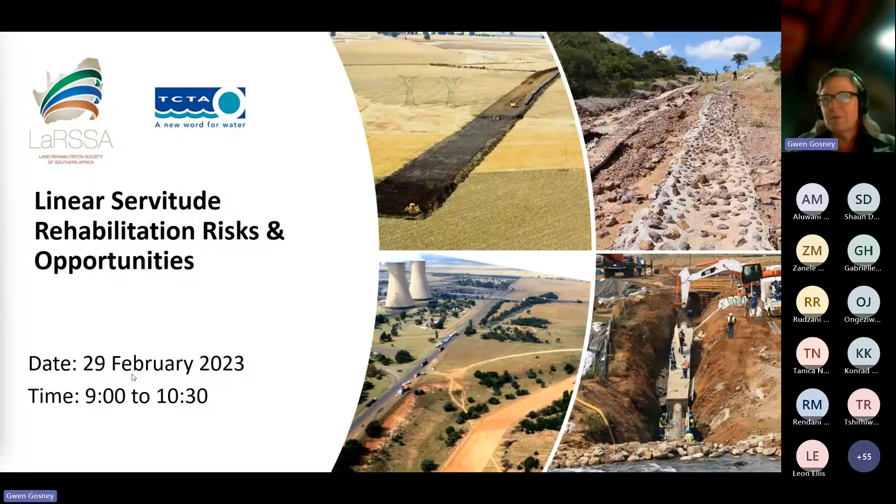It's all about thinking in lines. It's about thinking outside of the box, down the line, having a bit of vision. But at the same time, it's very important that as a person working in linear infrastructure, whether or not you're working in the rehabilitation element, you don't end up with tunnel vision, because that's the last thing we need. Ironically, working down a line, you need a very open mind and a very wide way of thinking.

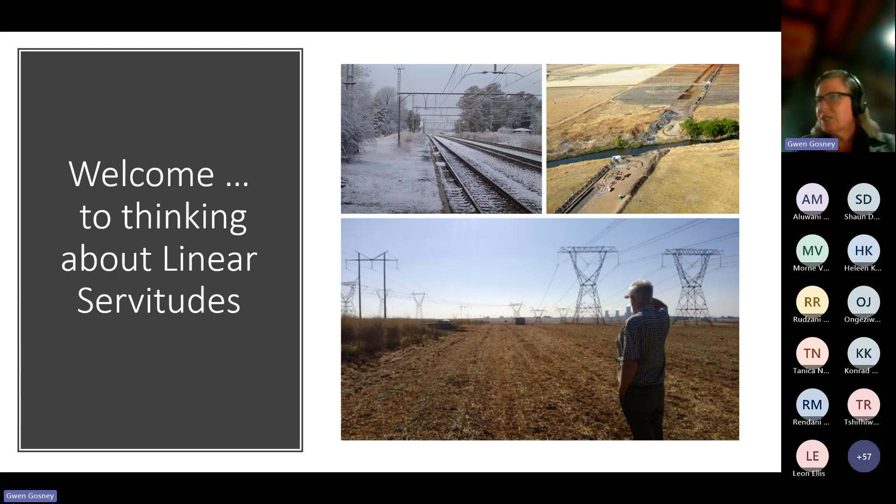So I'm not going to be able to divulge or go too much into roads and railways. I'm relying on input from the audience for that. My specific interest and passion has been with pipelines, particularly subsurface pipelines. Of recent, right in the beginning and right at the end here, we've been working with pipelines as a form of conveyancing infrastructure for large interbasin transfers of water.

I work for TCTA, who you will see is up here at the corner. We provide infrastructure to the Department of Water and Sanitation, dams and pipelines, so that they're able to convey this valuable resource of water all the way through to the water boards, the municipalities, and if the pipes are not too broken, to the end users. But we really are involved in the bulk supply side of things.

But if you think about servitudes, linear servitudes and pipelines, the other part of my experience came from working on the NMPP pipelines. There was the 501 down to Durban, 500 kilometers, which I wasn't too involved in, but at the same time, I was involved in running the 3 inland lines concurrently. So that was a very interesting time for us.

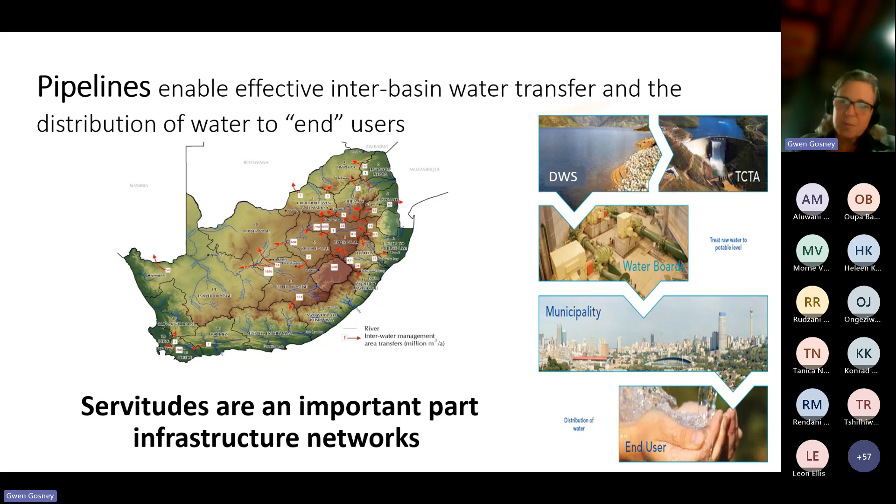Okay, great. Rudzani, I see you're involved with transmission lines. The pipelines often go parallel to the existing transmission lines. So yeah, I'm sure we'll see some transmission lines in the back here. And hopefully while we're chatting, we'll try and identify some of the differences between the kind of rehabilitation for transmission lines and that for the pipelines.

I think many of the rehabilitation challenges that we face on these linear projects are because people don't understand the complexity of what a pipeline means. It's a very narrow servitude. It's very easy to access. It's quick up and down in many ways. And people just think, oh, it's a small, narrow band. What can it really do? What's the real problem? For me, it's one of those things where it looks like a little straw and it's so easy to deal with.

And I thought in the beginning it was going to be easy. And I see we've got somebody from NCC Environmental Services, and I was with them when I started this pipeline journey. And Dean Ferreira was there, and he said to me, we've got this little job. It's a big pipeline construction. We just need you up there for a few months. And that was in 2006. And I'm still up here dealing with pipelines in one way or another.

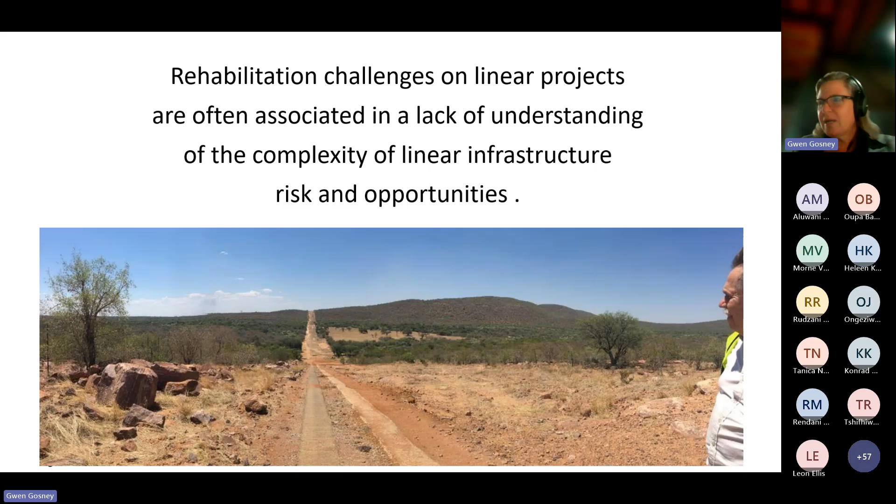So what makes a pipeline or these linear servitudes very different is we have a huge number of stakeholders. Each of those stakeholders along that linear infrastructure has got their own needs and expectations. Those needs and expectations often relate to their land use and very much their expectations of how you're going to look after their interests. So that's very interesting.

These long narrow servitudes cross so many different landscape features, ones you can see as well as those you can't. We're going to talk about all of these things in detail. Numerous land portions have got different ownership. We've got some land that belongs to huge commercial farmers, others that belongs to community organizations. Some of it's got informal settlements on it that don't have any original land ownership, but it just settled on those properties.

So the topography is another interesting thing, constantly changing, always up and down, literally from left to right. The topography plays a major role in how we design and successfully manage rehabilitation within our servitudes. The range of land uses, we'll see lots of examples just now. And I think anyone who's done any linear infrastructure will always be surprised by the number of land uses that you can find along a straight line.

The boundaries and the interfaces along edges, when I did my master's degree, was a major finding for me. It's like realizing that this is one of our most sensitive areas, is anywhere where you have an edge or a boundary. And then always there's these access and accessibility constraints that make pipelines different from being able to drive up to another area, a farm, a mining rehab site. You've got security and access control there, but you don't have a problem getting to the point there is generally access provided in one way or another.

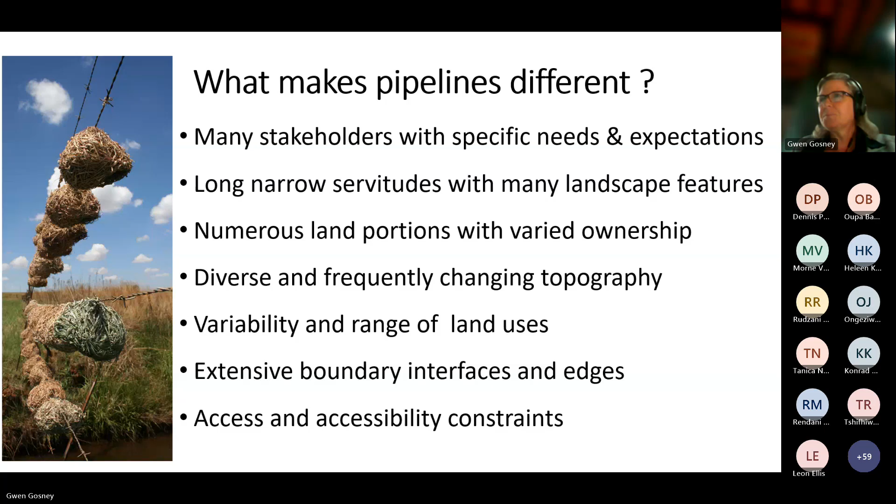Typical servitude challenges that we deal with include the suitability of the design of the rehabilitation to achieve its objective, and quality control and supervision. It doesn't help to have the best designed rehabilitation plans if the actual implementation and control of these great plans didn't work so well.

Slow rehabilitation and lagging construction works is another issue. Quite often on a linear infrastructure with pipelines like this, you've got a lot of damage to go and fix, but it doesn't help when there are lots of technical issues that people have to go back and fix along the pipeline, literally accessing over the rehabilitation you've just completed, probably almost got to sign off.

Drainage and erosion problems are immense. Impacted soils and impacts on the soil chemistry, the organic content, and just the physical structure of the soil can be quite heavy depending on the kind of development that's taken place.

Failing access routes are also a challenge, particularly over time - it's not always easy to access. Even if there was an access route designed in, sometimes they fail and you can't always get to where you want to be. And then, of course, Mother Nature and Father Time always throw a few interesting curveballs at us when we're trying to do rehabilitation.

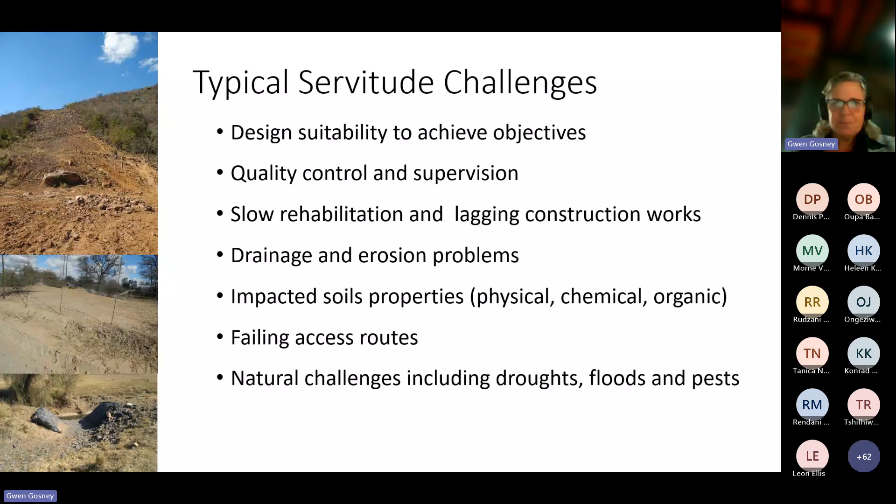I think the first and best place to start is understanding the relationship between the receiving environment, the type of disturbance, and the rehabilitation that has to take place.

And it's really difficult when you've got to come in and look at how we limit the risks and make the most of our opportunities in these areas, to really understand that the sensitivity and changeability of that sensitivity rating is huge. But we have to look at how we rehabilitate in terms of planning it.

You can't plan rehabilitation up front and think you've done a great job. A lot of people get an EMP after having authorization for a linear infrastructure development like this, and go ahead and develop a specification. But we really have to then apply ourselves at that early phase and ask: how is this rehabilitation specification going to stand up to the project challenges - the impacts it's going to get, the nature, the intensity, the extent of the impact, and how long?

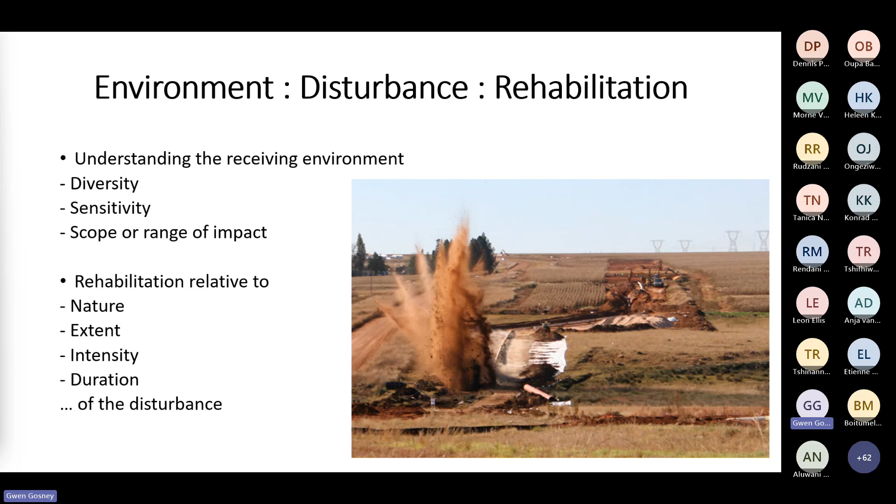Okay, let's see - typical rehabilitation challenges. There's a lot of planning and planning documentation that's always required. And quite often at the end, I think we look back and say, well, was this something we really wanted to do, really needed to do? The suitability of requirements.

A lot of these things we're going to have a look at, I've already mentioned. It's just like a page to put everything together. Poor drainage management, I don't think I've spoken about before, but that's a big thing.

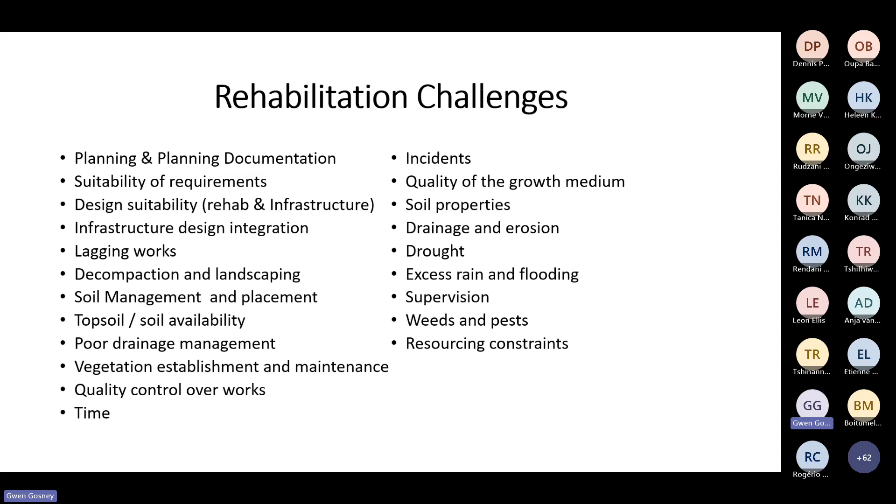We're going to go through all of this, and time is often not on our side, particularly with pipelines. There's a lot of pressure to get construction completed and handed back to the landowners, so we can hand the projects over to someone else. That time pressure is big for us, but the problem is that your cost, your time, and your quality go out the window if you haven't done your planning properly.

This is where our rehabilitation is often really heavy. When I did my master's, I looked at what the requirements were for us in planning rehabilitation, at our authorization conditions and legislation, and at all the control and source documents of where the requirements were coming from.

It was very interesting to see there was a lot of requirements around planning and administration, but as you got into the nitty-gritty of the work, there was very little required in terms of showing your planning of drainage management, landscaping, vegetation, maintenance, monitoring and evaluation - that was a total gap. They required method statements for certain things, but not for maintenance or monitoring and evaluation. Mitigation measures had to be planned and designed, but they weren't monitored or measured to determine whether they were being effective.

Our friends in auditing and compliance are always there and very strong, but I would argue that compliance to a bad requirement is probably more dangerous than non-compliance, for the sake of environmental protection. We might see a few examples of that as we go through.

There's always requirements to document and report on your planning and monitoring, but they don't ask you to document and report how things are going with the interim actions around landscaping and preparation. There's very little sign-off and acceptance interest during the actual brunt of the main work and the maintenance - they just want to know it's planned properly and closed out properly. That's a bit of a gray area for me, and it's something we're working to improve as we go into new projects with improved controls.

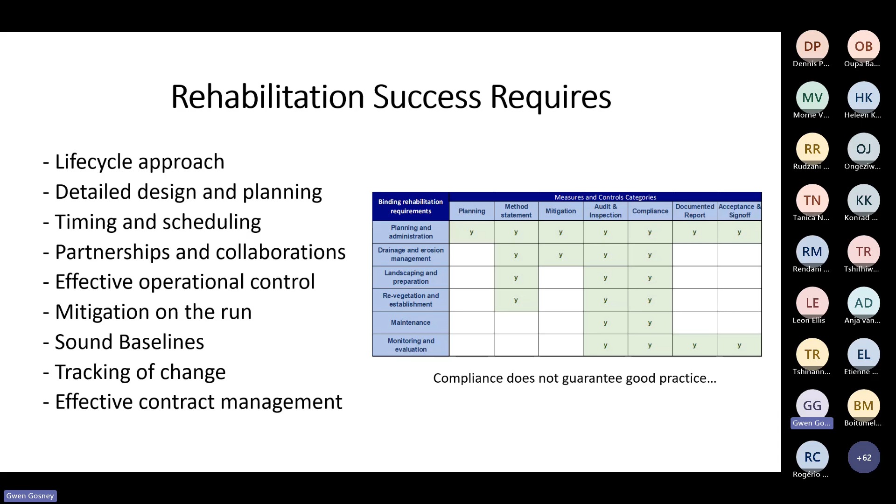So let's have a look at some of the interesting stuff. Linear considerations - there's always this knock-on effect, this ripple effect. If one thing is not done properly, it has an effect all the way down the line.

It's something we've had to look at and really say, how do we make sure that the variability in our servitudes and our landscapes is catered for properly, and that the knock-on effect down the line, that ripple effect, is dealt with properly? Topography, soils, vegetation, land use, and the land management philosophy.

The land management philosophy is interesting because each different land portion, landowner, and land user whose property you cross has a different philosophy on what should be happening, and they're all experts. So it's very interesting sometimes as the environmental practitioner on a site to come in and deal with those various philosophies and reconcile your planning with the expectations of those landowners.

End-state planning is often something we don't consider. My very first pipeline, the specification was to take everything back to grass immediately. But at least a third of the construction servitude was through maize lands, and if anyone knows a maize farmer, you'll know that grass is weed number one. So that's really about making sure that end-state planning is understood.

Quality input information is always very valuable. We get a lot from the impact assessments, but quite often it's exceptionally generic. There's a lot of baseline studies and pre-construction surveys that need to be done to make sure we properly capture what the baseline conditions are.

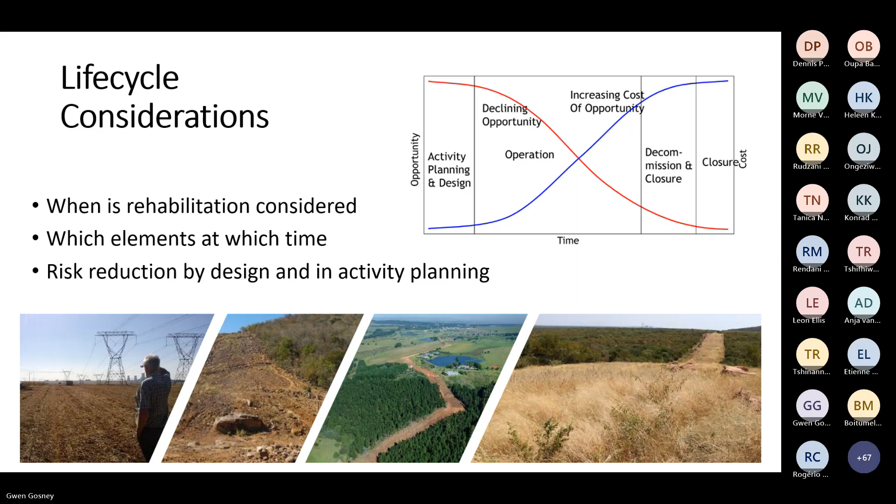We have to ask ourselves, and this is a frustration from many people in the environmental management space: oh, but it's an environmental thing. This rehab stuff, it's just going to quickly plant grass, and it's this environmental job at the end of the project. And it's okay if we demobilize all the other resources and just leave an environmental officer on site to watch the grass grow.

But if we're going to do effective rehabilitation planning, specifically of linear infrastructure, but I think this is common to all rehabilitation planning, we have to really understand that this takes place through the project life cycle and that there are a huge number of interdisciplinary people that collaborate to give us these successful results. I'm not just talking about the knowledge and practice areas that are environmental sciences, your rehabilitation specialists, your wetlands, your ecology people. We need specialists who understand scheduling, costing, resourcing, procurement. We really need to make sure all of these areas perform well in the way we specify our rehabilitation, go about resourcing it and planning it.

There are a lot of considerations that are not environmental considerations. And the one thing I don't have here seems to be designers. Designers and hydrologists, people who understand the flow of water through a landscape, need to be deeply involved in the drainage management planning of our rehabilitation for closure. Otherwise, we're just not going to get it.

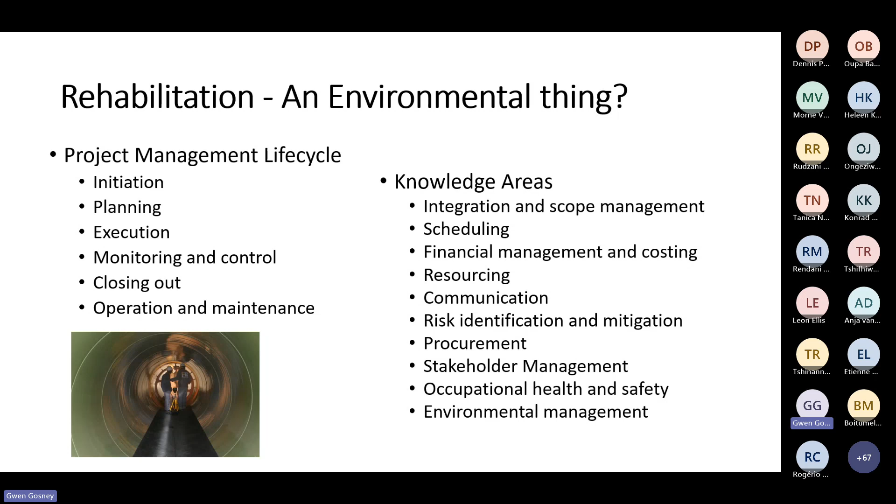So it really isn't just an environmental thing. There's a lot of environmental specialists involved in proper rehabilitation planning, but I'd like to urge that it's so much more. It's not something that happens at the end of a project, but that we really have to integrate into it.

We want to be paid for what we're doing. We want value for money when we're delivering it. And we want to make sure that there are no unexpected financial impacts or implications on us. We all know about rehabilitation provisioning and making sure there's financial resources, but it goes far beyond that. The landowner on the property wants to know that there's going to be no impact on his actual income potential and earning from that property when it's returned to him.

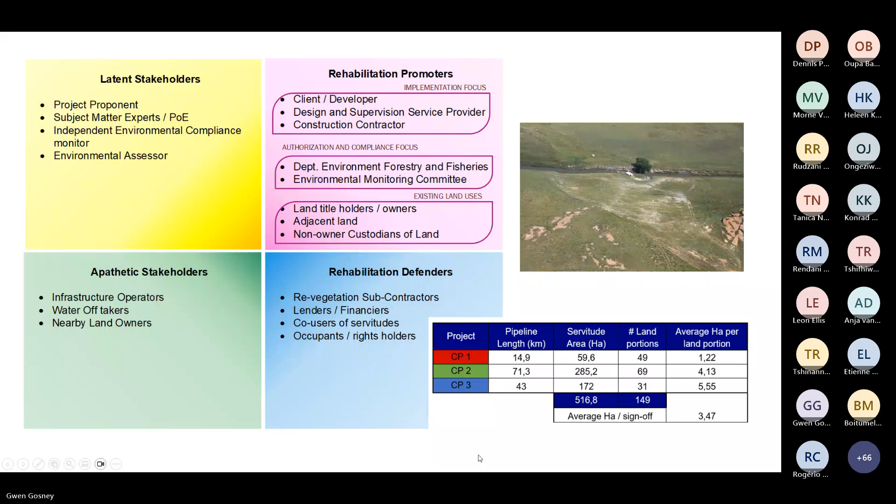These stakeholders come from many different walks of life, many different economic classes. And yeah, we've all heard the thing: not in my back garden, not on my back doorstep. Well, this is how it is.

Our linear pipeline developments go through a huge array of land uses. The specifications and the planning from an impact assessment perspective do not always consider the needs and expectations of those land users from a rehabilitation perspective.

They all look at it from a construction perspective - irritation and people being frustrated at the noise or the dust. But they're not really looking at a lot of the core issues of what is going to happen with rehabilitation towards the closure of our projects.

We've got high-end developments that have existing services that might be disrupted as we're constructing. But we also go through some very rural communities. And I always ask, what is the quality of the planning that's gone into this infrastructure development when you're taking a raw water bulk transfer line through a settlement where there is no access to running water?

So that's a very interesting thing around stakeholder engagement when you want to get buy-in.

Our construction servitudes - when I say the specifications are not always dynamic enough to cope with the type of end-use planning that our stakeholders need us to account for. We've got vegetable gardens, we've got crop farms, we've got other linear infrastructure owners. But then, of course, there's private properties and golf clubs.

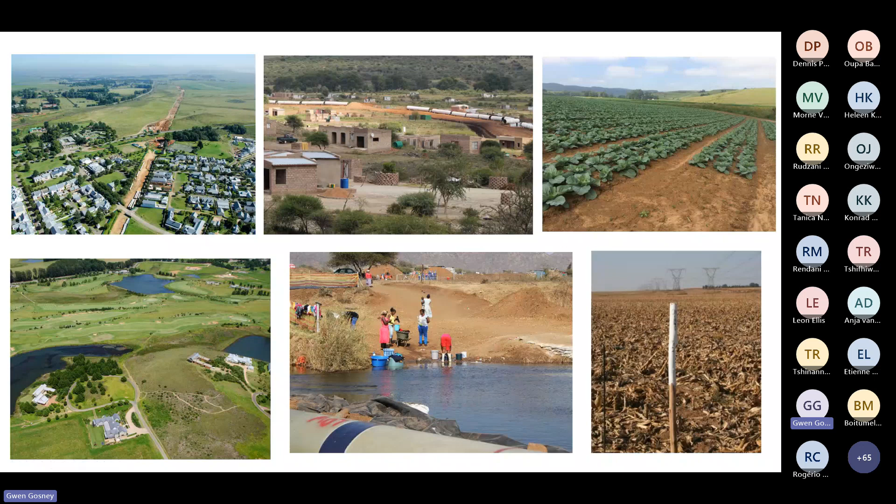This bottom one is a golf club where we had to do some very intricate rehabilitation planning in collaboration with the golf course to make sure that we didn't impact their greens and their fairways too badly. So it really is about making sure that you have a fit-for-purpose rehabilitation plan.

Space constraints - I see Sean Davis is in here, and he's also had some trouble up on the new pipeline that they're planning, always talking about space constraints. And it really is quite something.

These photographs are from another project, I think it was the NNPP project through Joburg somewhere here, where we really see the team having to apply construction methodologies and planning, health and safety planning to cope with the intricacies of the space constraints that are involved in some of these construction servitudes.

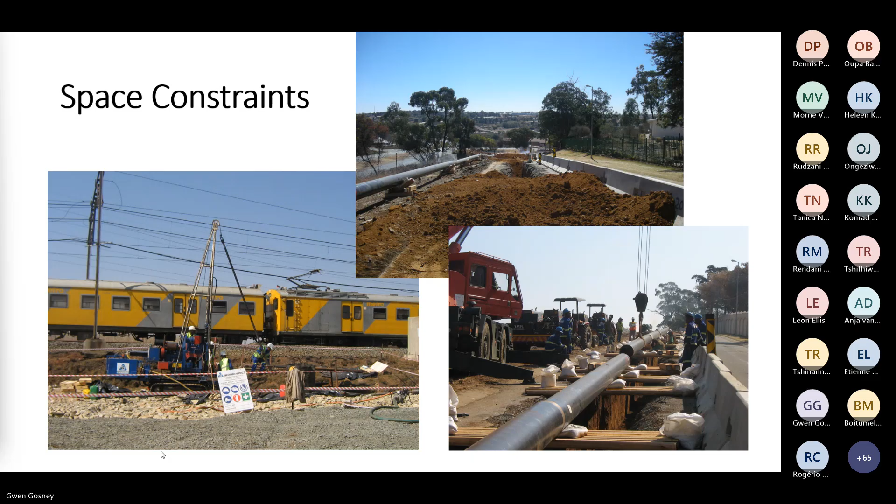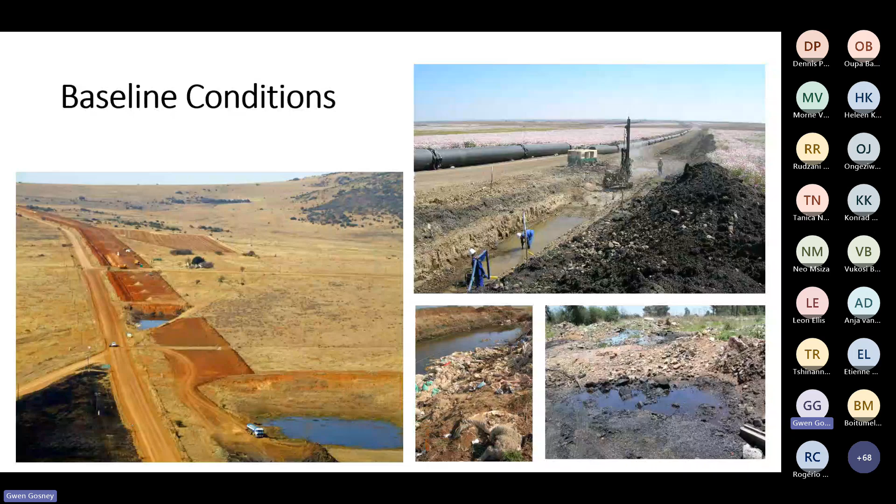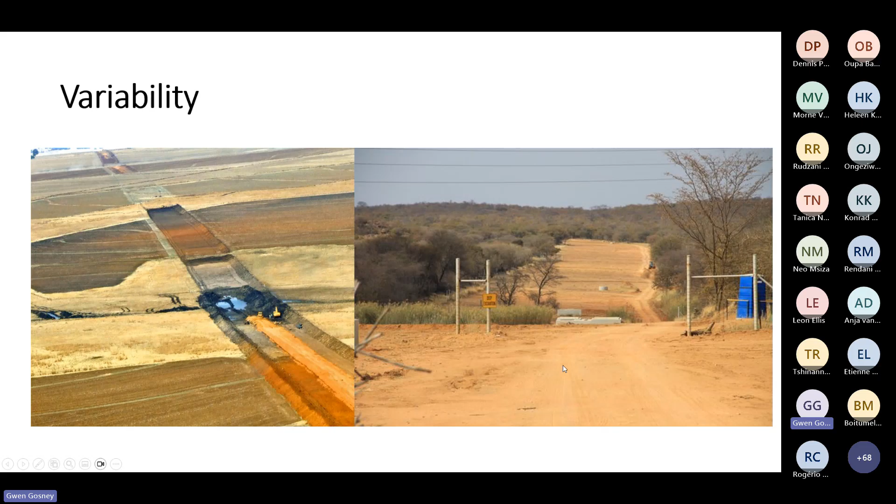Much appreciated. Okay, so we chatted quickly about baseline conditions and how important it is to have a proper characterization of your baseline studies that captures the variability. We've spoken about how quickly a little wetland can pop up on your servitude, and the requirements around working in these wetlands and your construction and rehabilitation techniques are quite different to what you would do in the main areas of your servitude. The soil variability is massive, so that's very important to take into account. We intercept a huge number of different features on the landscape as we go down the servitude, and this is a major consideration in designing your reinstatement or rehabilitation.

Not all infrastructure that we are intercepting is visible. Some of it can be full of strange substances that can impact not only on your construction process, but if one damages these subsurface pipelines, you could be releasing mine wastewater or something similar into your rehabilitation area, impacting its success. You may have to reinstate all the services you intercept as you go.

Whether you're intercepting large scale or small scale crop farms, it's important to understand how you impact on the lives and livelihoods of people in that area, and that your reinstatement program and planning helps people who depend on the land get back to normal operation as quickly as possible.

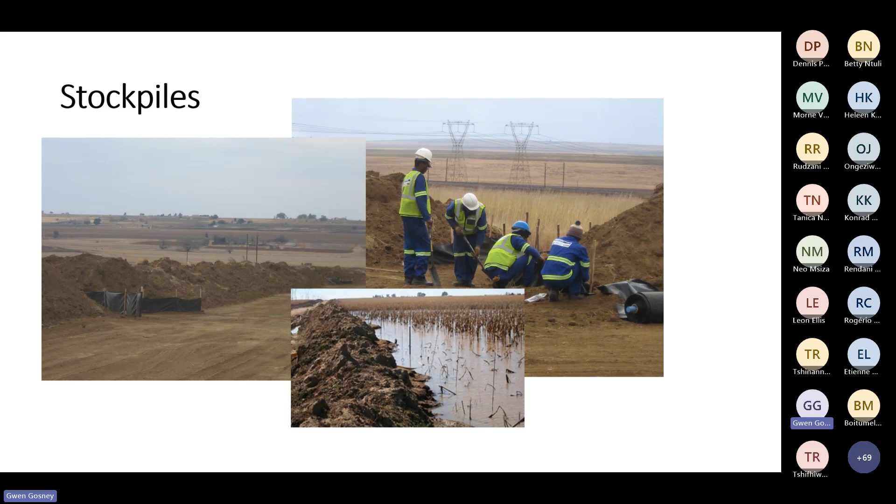If you do stockpiling incorrectly, like on this bottom picture, we were going through a low point in a landscape that was traditionally a wetland. The farmer had planted maize into this wetland, so it wasn't as visible as we would have liked. The stockpiling was a continuous stockpile in line with the compliance obligation for the project. However, we soon found water accumulating behind the stockpile, and it flooded the farmer's crops. He was not impressed.

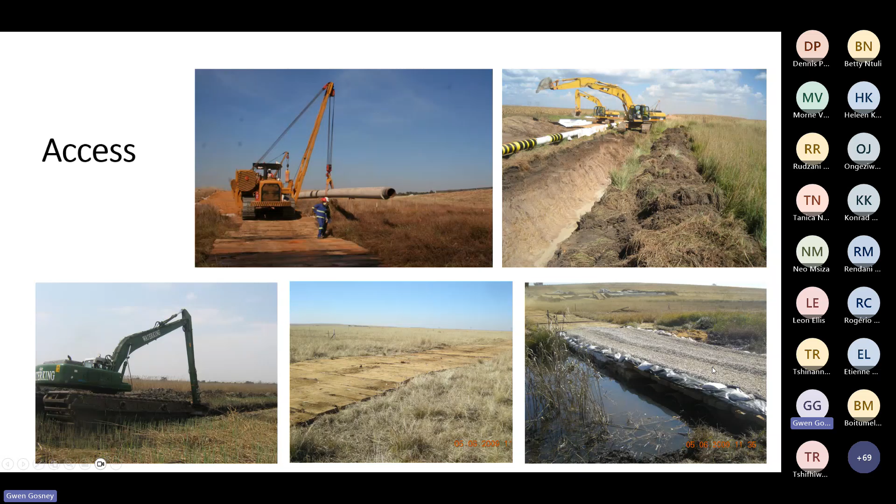Trenching is one of those things that is very variable. If anyone's a soil scientist and passionate about soil studies, trenches are your friend, because you can see the soil profile - it makes you very happy. I'm not a soil scientist, and all I see when I see trenching like this is a lot of work. Typically, solid trench walls occur where there's a lot of rock, a lot of blasting and excavation through hard surfaces. You have greater trench stability, and it's not such a risk for rehabilitation.

But the minute you have to work through wet and soft ground, we end up with collapsing trench walls that need to be battered back on the sides like this. One of our major rehabilitation issues on projects arises if the team doing that excavation and planning suddenly changes the design or shape of the excavation without realizing they have to remove more fertile soil, so that we can plan for backfill - and you end up with material shortages. So that's always an interesting provision.

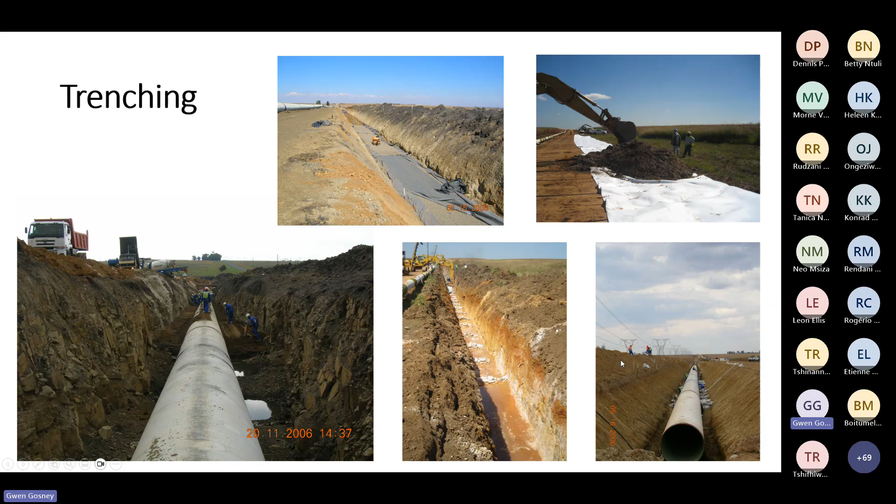And then how the works are designed. We can design our projects to make our lives easier or to make our lives more difficult. And sometimes it's not on purpose - sometimes it's just that we have a knowledge or practice gap that's really complicated and we haven't quite figured it out.

I do not personally enjoy river diversions. I find them to be very large and onerous. I've had the privilege of working with teams who know how to do live river crossings and how to flume rivers, big ones and small ones, and keep them flowing during construction. It is an art, it is a science, and it's a little bit of luck as well. But some other infrastructure forms do not allow you that opportunity, and you have to find different ways to divert streams and rivers around the works.

This particular concrete encasement happening over here in this very busy picture shows you how busy a narrow servitude can get. It has to stay open for at least 3 months while these guys are working. So the quality of those river diversions is very important.

The risks around how river diversions are managed leads to flooding and trench problems, washing away material. The longer these areas are exposed, the more difficult it is to stabilize and rehabilitate them. The way the works are designed into the landscape has a major impact on what it looks like and how we rehabilitate it at the end.

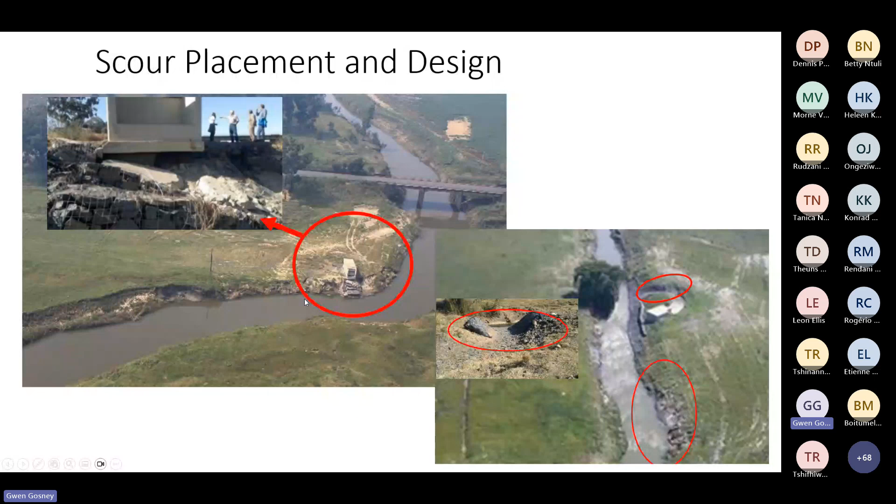Some of the other scour outlet designs - here's a much nicer picture of our good practice. Some of our earlier projects had scour outlets with these very broad spray formations for releasing water. They required exceptionally intensive erosion protection. So what happened is they changed the design on future projects so that we have a more up-and-over release that comes into these natural stilling basins. It's a much better option.

But on the same project that has such good practice, you can also have bad practice. And it just comes down to the people on the ground understanding the intention of specifications for erosion protection, for stone pitching or rock packing to break the intensity of water.

This is where multidisciplinary collaboration comes in, making sure that the range of professionals involved in designing erosion protection ensure that our landscapes and rehabilitated servitudes afterwards remain functional, low risk, and low maintenance for the people who have to operate and live in these areas and depend on the land.

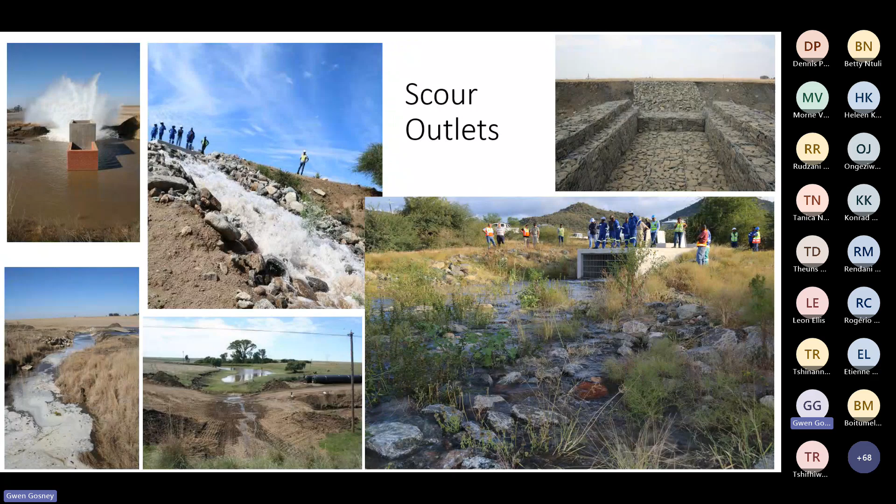Drainage management is not always our fault. One of the really tricky things about managing a servitude is you have to consider what's happening in the landscape around you. It's not good enough to just look at the construction footprint. Maybe your trench is going to be intercepting a wetland further up a slope and you're going to drain it by accident. It's very important that we understand the implications of what's happening on the land around us.

The inside of the construction servitude on this particular project shows no signs of erosion or drainage management problems. It's working well.

I'm not seeing any issues there, except that we had a major rainstorm. The grass and vegetation on the outside of the servitude had hidden and obscured these little pipes underneath the farm access road—a tiny culvert on a very big, flat, sandy slope. It was no risk; nobody picked it up as a potential problem. But the picture just below, with a piece of exposed pipe and yellow tape, shows what happened before it was repaired. Drainage through that culvert on that private property, just normal stormwater management, managed to cause major erosion on this flat sandy area, exposing the pipe.

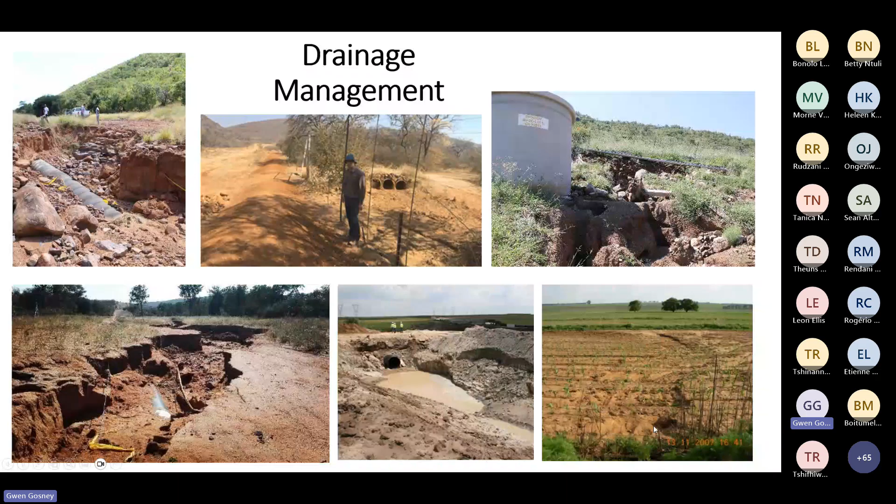Here we've got an example of a wash where rehabilitated landscapes are draining through a farmer's maize land and causing damage. So it's not just during construction that we have to monitor drainage management, but also during operations and maintenance of the rehabilitation and post-construction servitude.

For people involved in rehabilitation, I'm not going to go into the whole decompaction process too much, just to say it's an exceptionally important part of what we do. The intensity of the disturbance that area has endured is very important when planning your decompaction, and the longer and more you can limit compaction, the better. The other feature we often find is that when you start decompacting land, you uncover all the buried sins—waste that wasn't thrown away properly, things that weren't properly protected.

So I think if we start decompacting and doing the final preparations for rehabilitation, we discover a lot of little sins that need to be addressed and fixed up as we go ahead. Soil preparation again, you might remember the picture at the beginning of the presentation that had that huge variability across the landscape on this linear infrastructure, showing how do we make sure the soil protection measures and soil amelioration is fit for purpose at each point for each land use along the rehabilitation servitude.

It's an exceptionally intensive sampling process. We have to compare not only with the pre-construction part of the servitude, but more importantly with linear infrastructure, we also have to look at what's happening on the outside of the fence at the time of rehabilitation, because obviously the weather, the land use, the climate all play a very important role here.

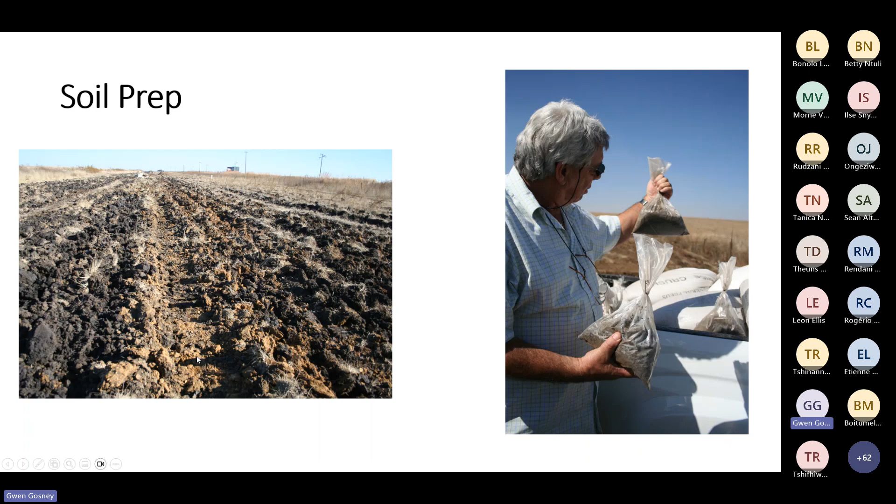The soil preparation over here, the decompaction, has highlighted another little sin in that this is part of the haul road - that's yellow material that's imported and hasn't been removed. And of course, you have to do soil amelioration to compensate for these impacts.

Quality of the growth medium is not always great. Sometimes we get beautiful deep sandy soils or gorgeous deep rich clays, but other times we find ourselves working through highly impacted areas. And for those of you involved in mining rehabilitation, you know just how difficult it is to have to rehabilitate in already impacted soils that are not the best growth medium.

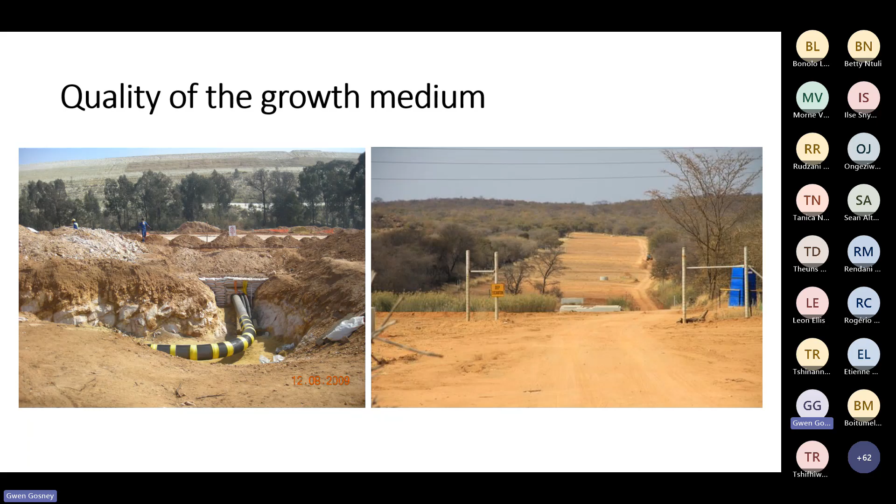Having the right tools for the job is exceptionally important. And again, it comes down to how we're planning what we're doing and what type of land use we're working on. When we're trying to decompact, rip, or scarify, do we need a small tractor or do we need these giant tines that can get really deep into the deep rooting zone? It really is about making sure that you have accessibility to the plant.

It also doesn't matter that you've got these things there if they're not working properly, not well maintained. So this really goes to making sure that as a rehabilitation planner, we're putting up our hands and asking for the right tools for the job.

Often those tools don't belong to us. The land users' property that we are crossing - those landowners, those farmers - often have the right implements for working their own soils and their own properties. What you do need to consider then is the implications of them getting damaged and how you compensate for that or plan for it.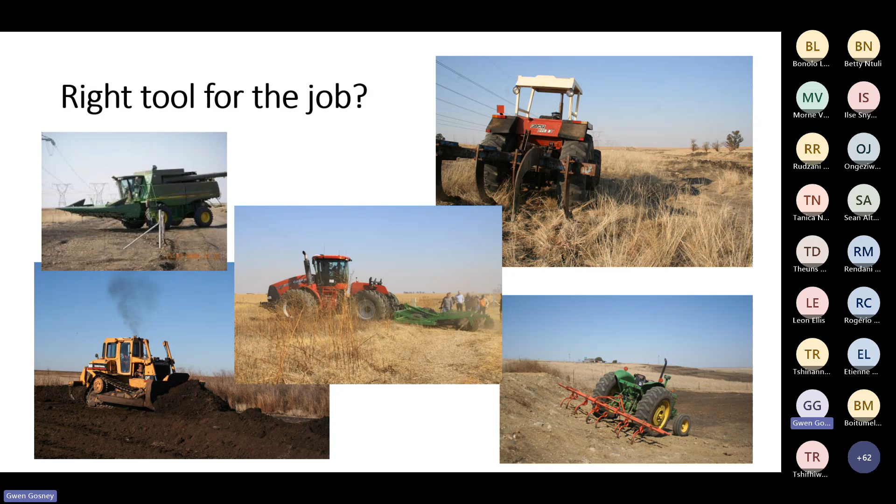The landforms and levels are particularly important. These servitudes have all been said to be ready for rehabilitation. The top one is Pine Tree Hill that I was talking about, where we had the original specification for indigenous grassing. One of my colleagues had to go through an immense amount of work to be allowed to plant kikuyu, which grows outside the servitude in this area, in non-compliance with the original authorization, to be able to stabilize the slope.

If they had not done that, they would have had huge problems. So when we are planning our construction and planning our rehabilitation, we really need to look at how people are managing levels and soils. As you can see in these two pictures, there is no provision here for enough material to reinstate the original landscape.

Having a look at how we finish and do our drainage management in different parts of the servitudes is also very important. Over here we have an example of a rocky surface through bushveld that's been cleared and grassed. It's a very stable example, but just around the corner, the project was struggling to meet a specification where they were being required to remove all rock and stone from the surface.

It's really not a good specification to have to meet. It should have been challenged and addressed. And eventually, after some time and a lot of effort and pain, they did manage to reinstate to something that was more like the natural environment on the outside of the fence.

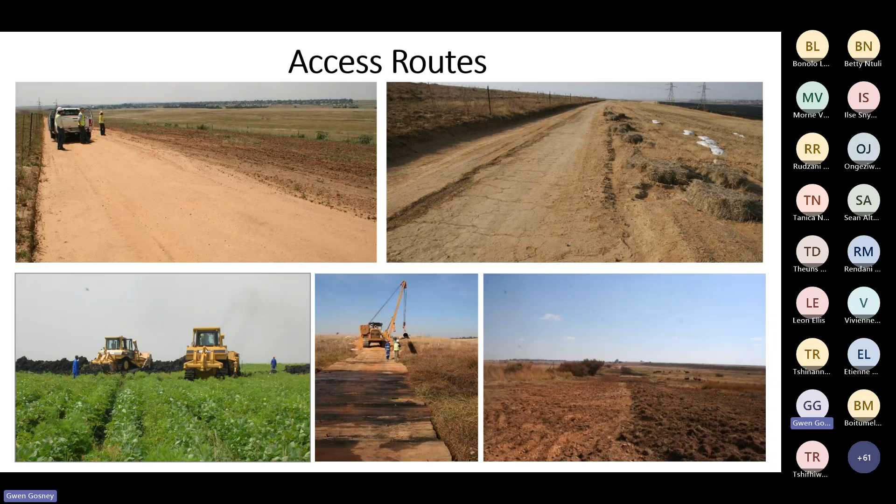Planting is something I'm sure a lot of our people are very familiar with when working in the rehabilitation space. These are just examples of hydroseeding, making sure you get an appropriate seed mix, that you're seeding at the correct time of year, and that when you are putting it down, you're doing it in a manner that's really going to deal with success. I know we've got tech talks on seeds and seeding coming up, so we're not going to delve into this too deeply.

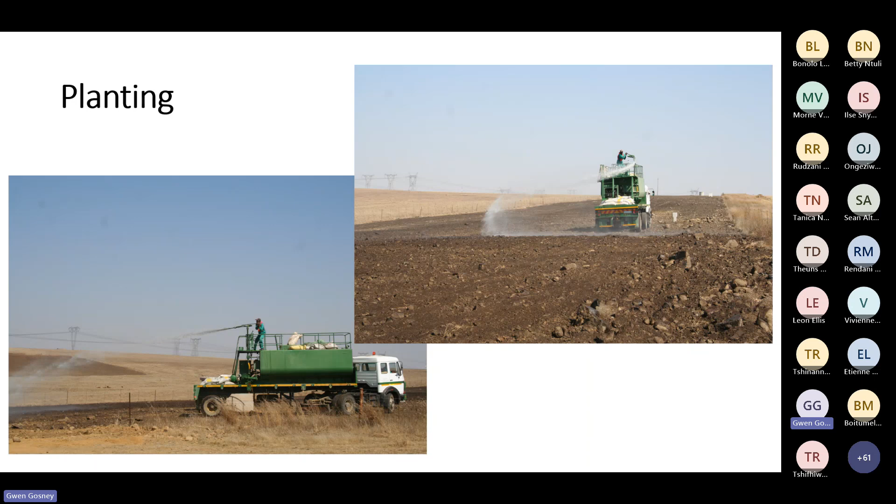We've got weeds, and we've spoken about weeds before, but weeds are a funny thing. As much as environmental authorizations tell us to maintain weed-free environments, and our requirements for looking after our soil stockpiles say you must keep them free of weeds, quite honestly, the weeds, if they are not allowed to go to seed like these have been, really do have fantastic soil holding ability, and they are fantastic pioneers who are not necessarily our worst enemy.

So it's about understanding the weeds, the role that they have during this disturbed state, and how we can use the rehabilitation process to get rid of them over time and make sure that we have a quality land use afterwards that is preferably weed free. But again, that stems from what's happening on the adjacent properties and how we manage that risk over time.

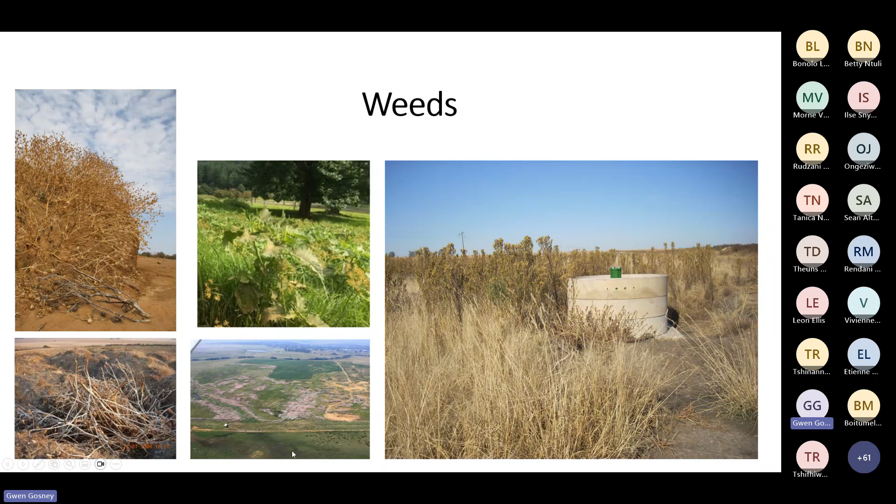Drainage management, I think, is one of the most tricky areas, and we have spoken about it a little bit before. But when you're working in areas like this particular place, called Ritsbreak Neck - anyone from the TCTA and Mokolo project would recognize it - drainage management through these areas is exceptionally difficult. We've got topography here that would cause any engineer, any land rehab person, absolute nightmares.

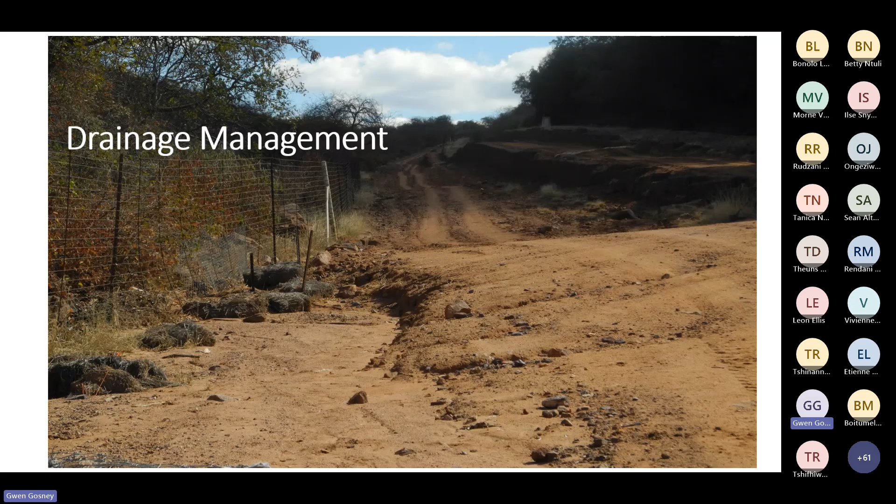The pipe construction has had to take place in a gabion embankment built over here, and we have to accommodate water down through this ravine, coming in from the sides at all angles and down the flow. So this was a really, excuse the pun, steep learning curve for the team, and they did a good job of eventually closing out the project, but it was an immense learning curve.

These are just other examples of drainage through Ritsbreak Neck, where we had to really learn to read the flow. The natural drainage flow across here seems to be along the bottom of the valley, but we have to cater for water that washes across the servitudes as well. At one point, the erosion protection structures put in this particular area thought it wise to take the water down the slope, but hindsight tells us that across the slope would have been a much better option, putting in different erosion control designs.

Here is some erosion control design from the opposite end of the servitude, dealing with runoff that's come in from the adjacent land. But then we've got that discharging to the base of these very big gabion structures, so obviously making sure the design at the base of these structures, the foundations, are designed and protected from erosion. You cannot make up for heavy rainfall - this particular erosion was caused here when they had over 100 mils in an hour.

It was exceptionally difficult to deal with the damage in this landscape. The benefit was that it showed all the issues with our rehabilitation drainage design at once. So what would have slowly manifested over time came down and manifested in one fell swoop, showing us the areas where we needed to improve drainage accommodation.

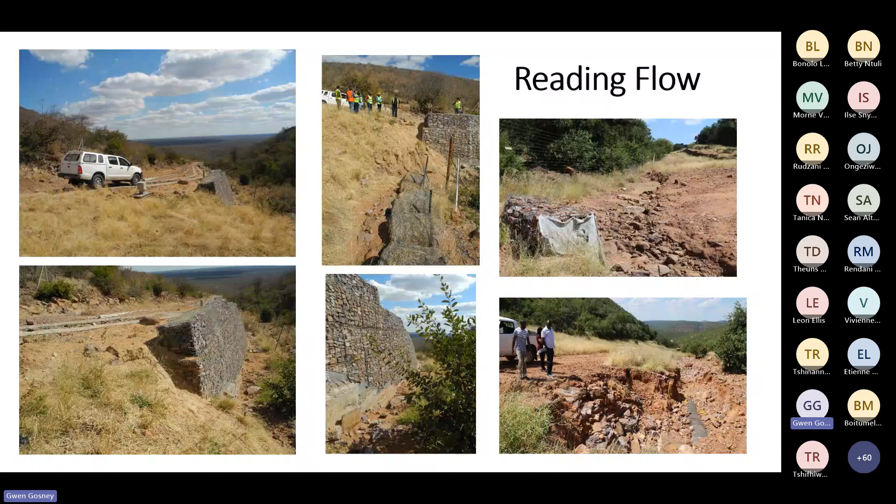I'm seeing comments saying that if you change the drainage characteristics and structures of the soil profile, there's also climatic issues to consider. There's a whole host of things one needs to take into account when dealing with drainage management. It is very important that you get the right specialists to assist. This is not something you leave to the operator to put in small berms as they go.

If we look at this particular situation, you'll find that's what happened in these two pictures with the scribbles on them. We have some croplands with farm contours that have been intercepted by the pipeline servitude. The team diligently put in their drainage control berms, very well and evenly spaced according to specification. However, they haven't tied it into the adjacent boundary or edge, making sure they're connecting and reinstating the contour from the farm on the adjacent property so the final servitude design is fit for purpose and drains effectively.

We seem to have had a few extra pictures jump in here, so that's quite interesting. I obviously lost them during our planning.

Over here, again, somebody's put in good intention and invested time and energy putting in a cutoff drain. But this particular drain is only going to aggravate the situation. It's going to intensify the erosion potential of the water gaining in this furrow. It's going to lead it to a servitude edge that isn't tied in with the adjacent landscape, and we're going to have major erosion control issues here as well.

If we look at the structure in the green background where the grass has grown, this rehabilitation is struggling. We've got corners here where the decompaction and re-topsoiling haven't worked very well. We also have erosion control structures, hard engineering structures, that are not tied in well with the landscape. They are eroding around and being washed out.

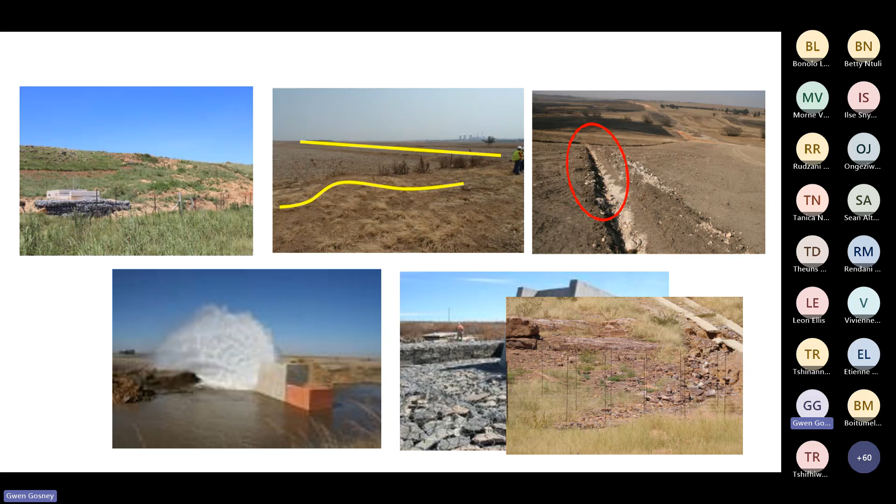I know I'm not a big fan of gabions, and I'm sure there are a lot of people very passionate about gabions out there, but these are a specialist thing. If you do not use gabions properly, you are intensifying your issues.

But in reality, we have to look right down the line and check the patches that are possibly forming in between. This really requires getting into the field, going down the length of the servitude, not having a look from the road edge which is easy access, and looking down the line where the grass obscures all the bare patches. It's about getting your boots dirty, getting into the grass, and going for a nice long walk, literally ground truthing the quality of the rehabilitation throughout the servitude.

But of course, if you've been with the project since the beginning, you should have done that ground truthing right from the start. When we have droughts and floods, they wreak havoc with us. Here there's an exclusion plot that was put in just to see if the disturbance on the outside of the servitude was causing the rehabilitation failure, but it's evident that the grassing hasn't worked inside or outside the exclusion plots. Here we've got a team who've worked very hard to make sure the farmer has got a good crop of vegetables again. And of course, we have to consider the impact of livestock at the phase of rehabilitation.

In many instances where you've got a lot of grass that's being created or a grassy servitude, it is good practice to bring in some herbivores to come and do some defoliation and get some nutrient cycling in and avoid encrusting, but definitely not at the germination phase where we're trying to establish the grass cover. So that's really something to look at.

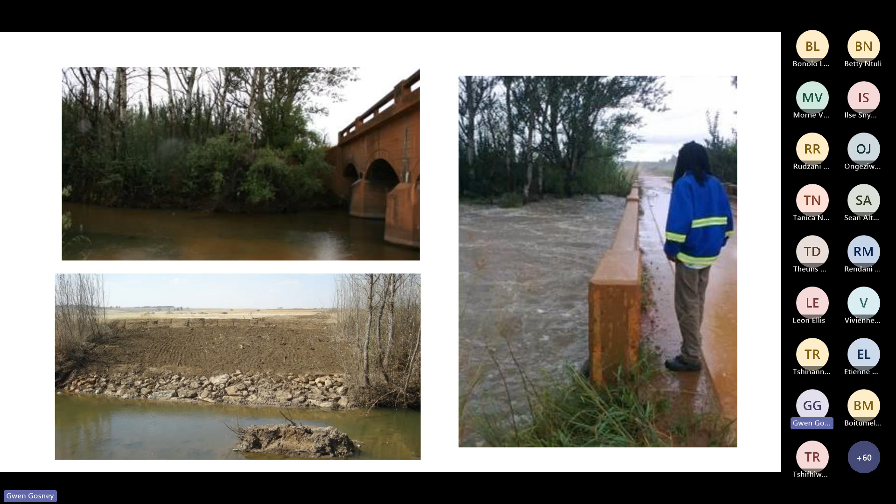It's very difficult, Renee. We can chat about how we budget for the unexpected, but I don't know if we can. We really just have to expect the unexpected. Budgeting for it is an absolute nightmare. We'll talk a bit about that just now.

Things that help: making sure you've got the right design of your running track. There, you see my pictures moved. Using bog mats and other technologies and ideas that are brought to you when they come, and they're out of the box, not quite what you're used to. Embrace it and think about it.

Limit your stripping as far as possible, changing your soil profile as little as possible. But at the same time, I want you to really think about what we said about limiting the intensity, the duration, and the area of impact.

Quite often, impact assessment inputs into our EMPs will tell us to reduce the footprint of the construction area as much as possible. It makes it a very intensive impact, which is very difficult to rehabilitate. If we were allowed, and in some cases we've applied for the opportunity to extend and broaden that impact zone, it reduces the intensity of the impact, makes it much easier to rehabilitate, and at the end of the day, it turns out to be the more environmentally suitable option.

Monitoring and maintenance is something that needs to take place over the longer term. And if you've managed your stakeholders correctly, it is possible to get the landowners and the land users involved in the long-term monitoring and risk limitation of those properties, supporting them and compensating them as necessary.

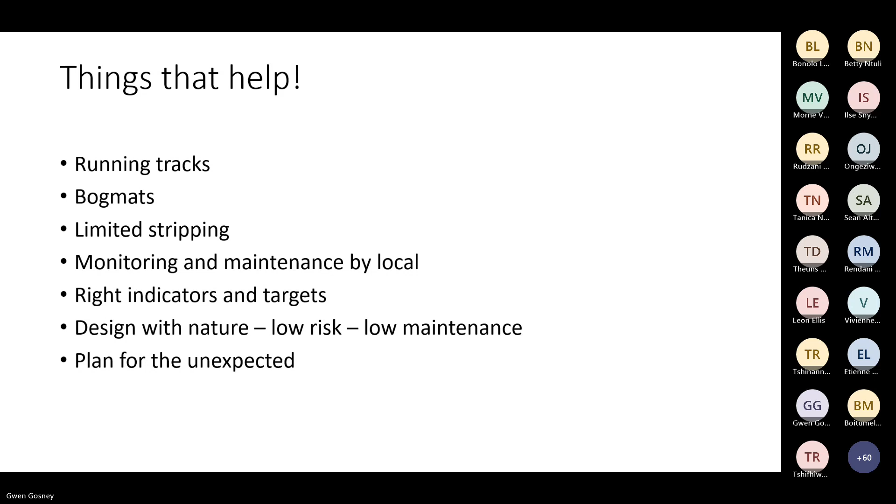Out of the box thinking - this is an extract from a report by Mike Mentis on one of our projects. It's that same Pine Tree Hill, and it shows that by applying non-orthodox good practice, you can limit the risk instead of going with the commonly accepted practice of seeding with indigenous grasses. It's about really doing your best to limit the risk you're facing rather than complying with the letter of every provision laid at your doorstep.

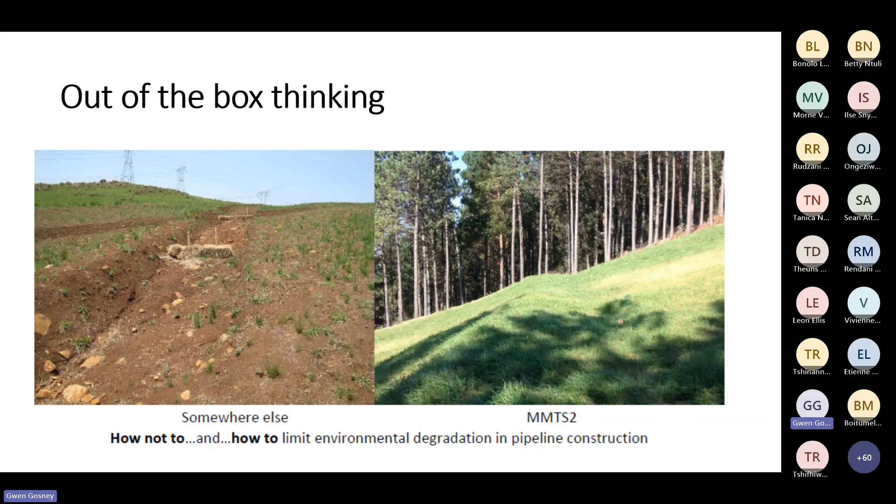Engage your mind, speak to the intention of that obligation, obviously following the correct amendment processes, but working with the authorities and demonstrating that you, as a responsible developer or rehabilitation specialist, are looking out for the best interest of the landscape. Property packs on the linear servitudes are something we've adopted across our projects.

It's really about understanding the construction planning from the outset, looking at the detailed design, how the technical works are undertaken, and using that life cycle history. So from the pre-construction survey data, the assets and infrastructure baseline data, all of this gets accumulated into a project or land portion specific folder that spans the lifespan of that property. In there, we've got baseline footage of what the pre-construction land use and land form were like, and we try to match that as closely as possible.

I find that having that property by property pack makes it much easier to get buy-in. The person you're dealing with, who has to sign off at the end of the day, can see the life cycle of pain they've lived through while you've been working in their back garden, and is more willing to accept that you've done your planning and risk mitigation effectively.

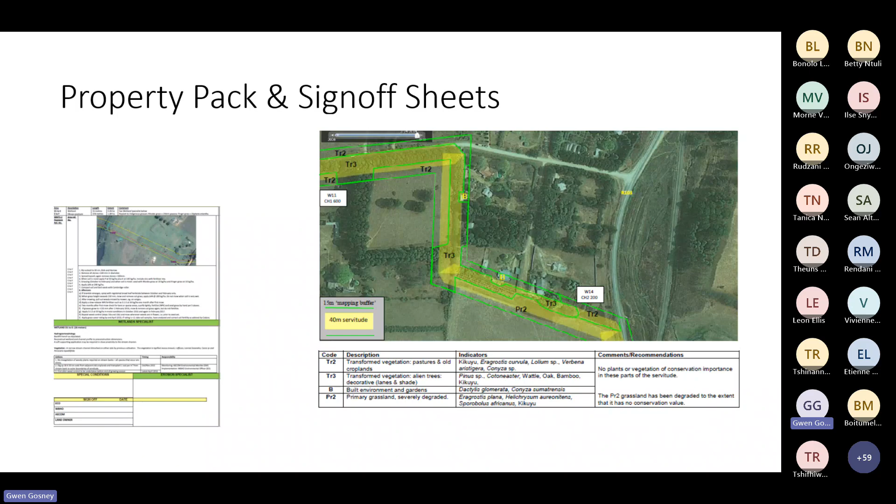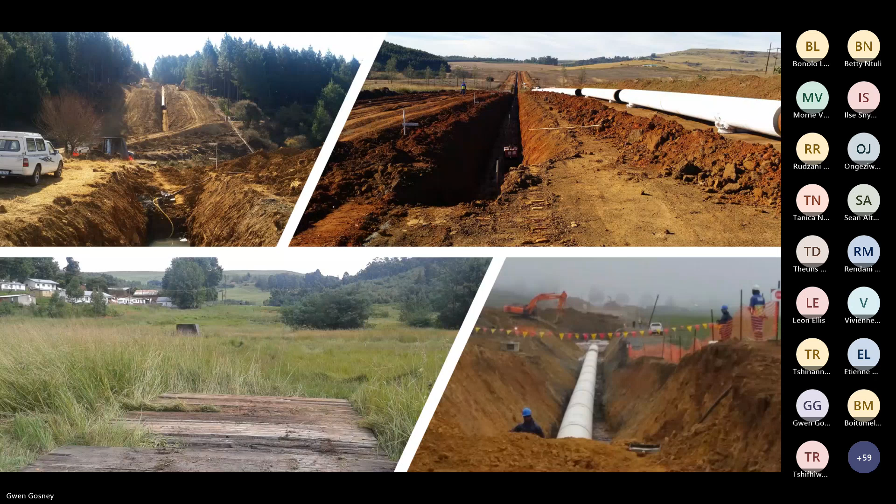It's obviously very important to have sign off at every phase of the rehabilitation process. It doesn't help to arrive at the grassing phase, see why we have grass establishment issues, and only then decide we didn't do our decompaction properly. It's important to have those hold points in your rehabilitation design and planning process, and then to manage things throughout their life cycle. Your property pack would show each step of this rehabilitation of Pine Tree Hill, even detailing what was done during construction, during the trenching, and how those risks were mitigated.

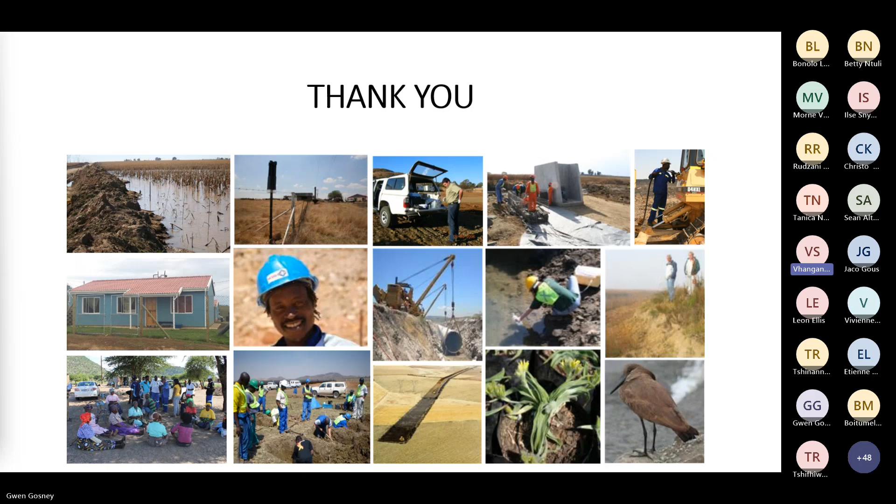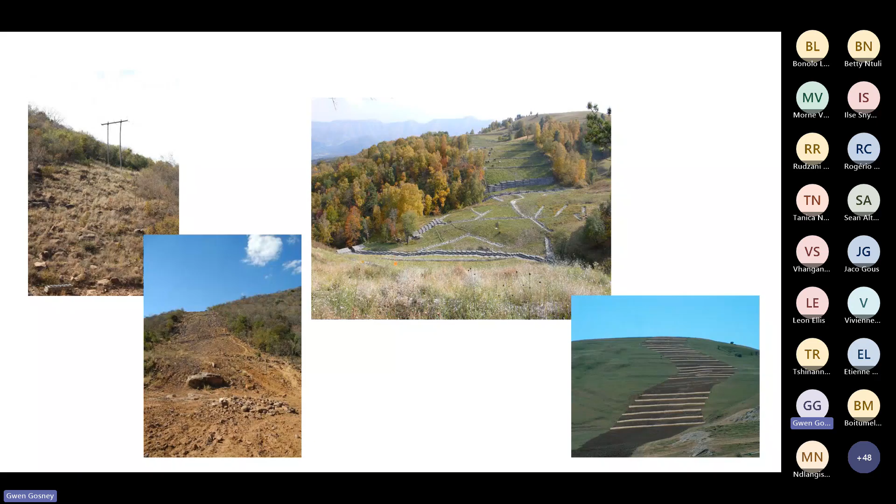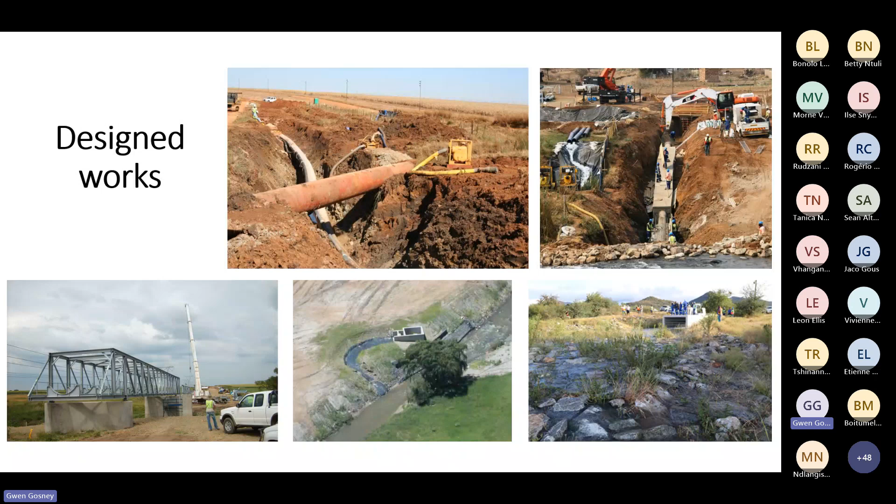I see you didn't have that as an issue on your side. It is an issue on many of the sites, it's just not in the presentation because we had so much to deal with. The subject matter we chose today comes from a study I did, and it wasn't a particular issue on that site, but it is a common problem on many sites. In our trenching and backfill design, we pay a lot of attention to trying to mitigate that particular risk, quite often ending up with a slightly raised area over the pipeline. That has a short-term local impact during the rehabilitation phase, but if there is any settlement or subsidence, then it is dealt with. On pipelines where we've had those issues, one of the challenges is the availability of the correct type of material to bring in and address the lay of the land there.

So yeah, it's a very important issue, and this is where your design challenges come in, making sure that not only is your trench compaction done correctly, but that you allow for settlement. Even just one of the other challenges you have is that you get water moving along these preferential pathways created by your trench if your compaction is not done properly, and you end up having underground cutoffs along your trench. So it really does speak to your rehabilitation success being one of the things you need to factor in during your inspection of your backfill and your final landscaping and shaping. I think a lot of the risk around subsidence also relates to the type of soils you're dealing with, so it'll be very interesting to continue that conversation.